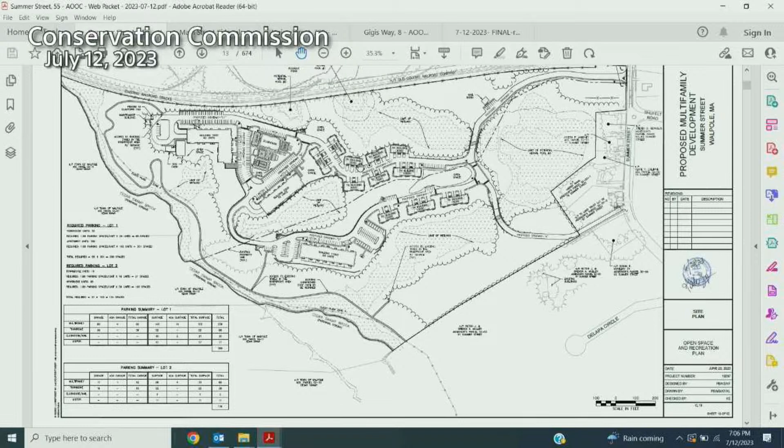Okay, thank you. So to remind the board, we are looking to modify the existing permitted project. The majority of the work is happening on Lot 2. What sheet are you on here? This is dated, called the red line plan. Is it in here? Do we have it? We have a truck turning plan. What's the number on the sheet? This was an exhibit plan previously submitted, dated June 6th. Oh, so from the last meeting, not in this package? Yes, it wasn't from the plan set.

Okay, go ahead. So this is the red line plan that was submitted, detailing the changes between the previously approved conformance plans and the new layout. On Lot 1, we have the removal of driveway B, which had the 2 townhouse units, in favor of the mail kiosk. On Lot 2, we have the single-family units along driveway D being removed, and the entire cul-de-sac as well as all the single families - all 56 single families are no longer being constructed - in favor of a rental project, which is going to be a multifamily building and 3 townhouse units: two 6-unit buildings and one 4-unit building.

Where the previously proposed and approved cul-de-sacs and single families are, it's just going to be the crossing and the emergency access back out to Summer Street.

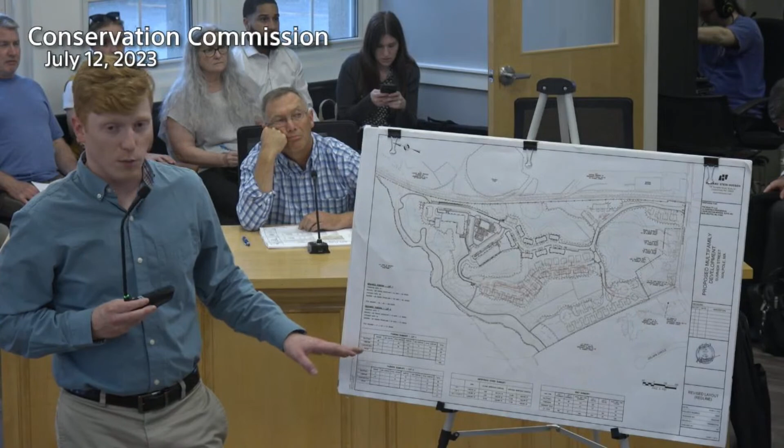We have the same 268 number of units between the 2 lots, and just some parking arrays adjacent to the multifamily building on Lot 2, as well as the conforming amount of parking per the previously approved decision. Overall, there's a reduction in impervious area and amount of development.

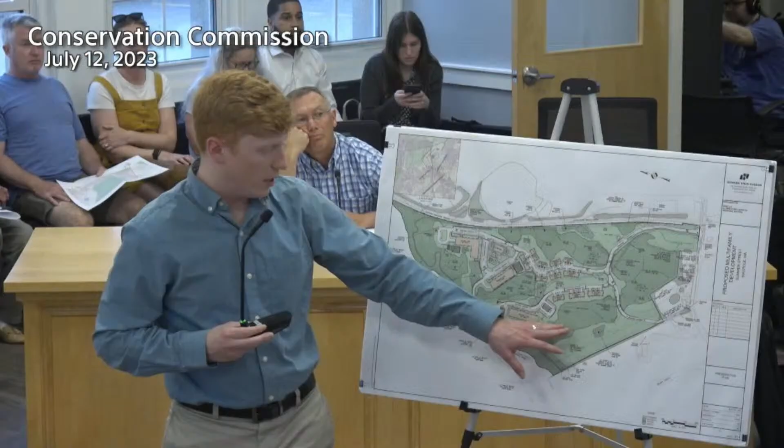On Lot 2, let me switch plans here. It's a colored up plan, which I previously submitted earlier today, which shows the overall development colored up between the impervious area, the building, and the areas for stormwater. In this area, you can tell there's a significant reduction since you only have the proposed infiltration pond here. That's a high level overview of the changes, and that's the red line plan.

High level overview of the changes to the plan. For stormwater, the program works very similar to how it was previously designed. There's a pocket wetland here which handles everything from the crossing, this entrance to the crossing, and that'll remain as designed. This center area is going to be an infiltration pond, as well as the addition of 2 StormTechs.

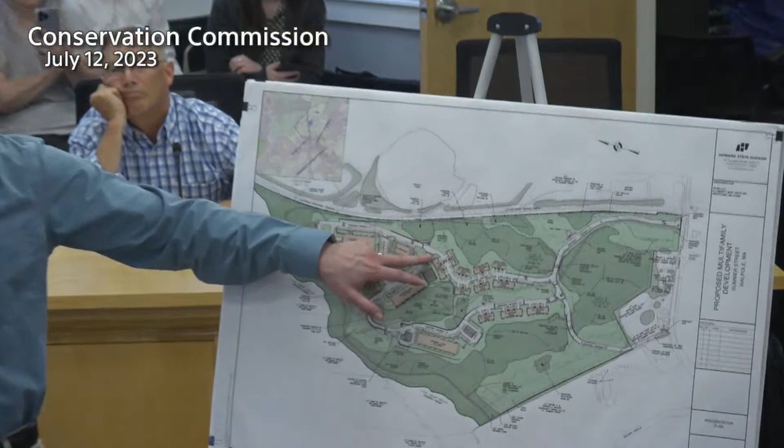All of Lot 1 is basically going to be identical to how it was in the conformance plans, with the exception of the reduction of this townhouse unit, which was flopped onto Lot 2. And where the emergency access goes out, you have the infiltration pond, which handles just that runoff from the other side of the crossing.

Any questions? Or I can go into any more detail if anybody is looking for additional detail.

Liz asked, are we gonna actually do anything with this giant set of plans? No, that's a truck turnaround plan.

The truck turnaround plan is very similar to the truck turnaround that was in the conformance plans, but it just details how the truck turning will work with the new layout.

That's not our jurisdiction, so why don't we have a set of plans that shows what you're talking about? That was all submitted with the package. No, these plans aren't anything like what you're talking about. There was a full package submitted on June 20th that had all the design for the entire site.

Yeah, stamped and signed on June 20th, it had all the grading, layout, landscaping. Maybe they're coming.

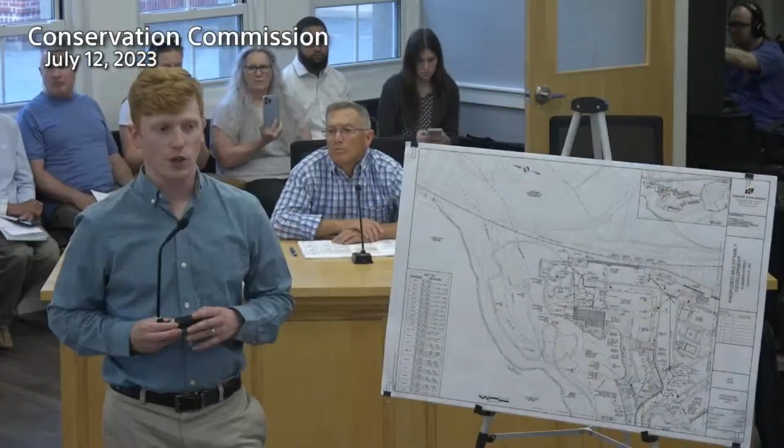It seems weird to have a truck turnaround plan. Yeah, we actually didn't submit the truck turning to conservation, we only sent that to ZBA. So they resubmitted the whole plan set, which Stephanie is sending out.

Start at the beginning and tell us what page we're on here, so we can follow you.

If you go to the open space and recreation plan, which I think is sheet 13, that'll probably give you a very similar overview of what this is, but this one's in color.

That should show you the open space area, the developed area, areas for recreation, as well as outlines of stormwater. That's pretty much an overview of what this is, and like I just walked you through how the stormwater will work on the site, and the changes shown on this plan, how we went from the single family to the rental portion.

Did you send that PDF to? This PDF? I sent it to you. Oh yes, I sent it to you. I apologize if I was supposed to CC you.

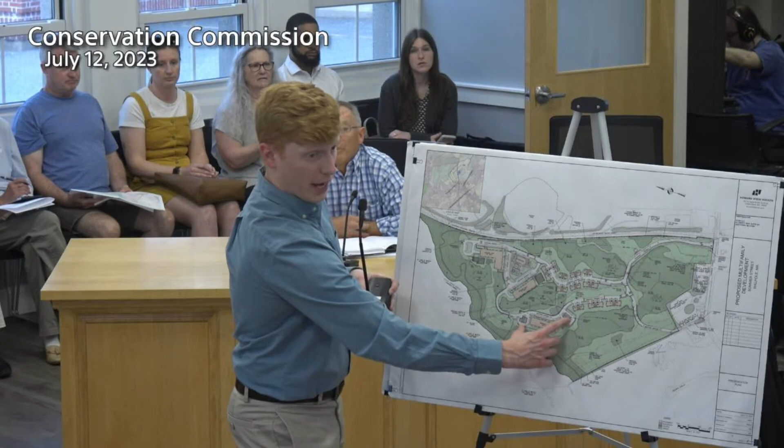So the modification to the stormwater is just the lower part of the project where it changed from single-family houses to apartment buildings. There was a slight modification of this pond here to adjust with the small adjustment of the alignment of this road. It got a little closer here, and because of that, we had some StormTech added to handle this roof runoff, as well as take up some additional capacity.

You could point to the sheet in the larger packet that addresses that area so they can see it more in detail. Sure, that'll be the grading sheets, sheet 20. Sheet 20 shows your drainage basin, the grading sheet. So grading sheet 20 has the detailed grading plans. So if you go to, that would be C20. C20, yes. Is there another number?

So is the stormwater increasing or decreasing, or really just modifying how you handle it? So, yes, the stormwater flows are very similar in the 2, 10, and 25. The 100-year flow and volume are decreased from the previous design, and that's shown in the supplemental data report. There's a sheet that has the difference between the pre and post flows, which was previously in the conformance plans as well, and that details the change as well as all the conformance with the TSS calcs and everything like that.

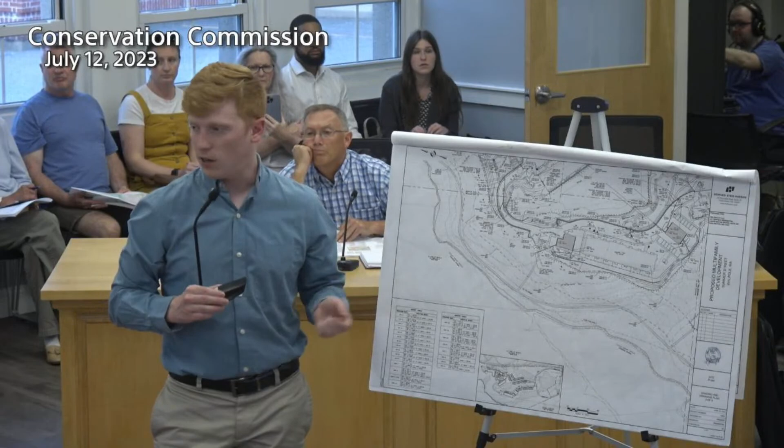And the C20 plan that we're now looking at has two infiltration areas. You're infiltrating the stormwater, the darker areas. Yes, so here is the pond, the infiltration pond 1, which is a slight adjustment to what it previously was. It had a bit more volume here, so we adjusted the volume and then took up some of this additional volume with these StormTechs under the parking array. This one overflows back to the pond, and this one just infiltrates and then overflows to overland flow.

And the envelope of the limit of work is the same, you're still out of the 200-foot riverfront area. Yep, no adjustments to the 200-foot riverfront. A couple silt fence adjustments along here, still out of the 25-foot no-disturb zone. And that would be the wetlands at the upper portion of C20. Yes, but overall, it's the same or a reduction. So other than C20, is there another plan where you have modified the design?

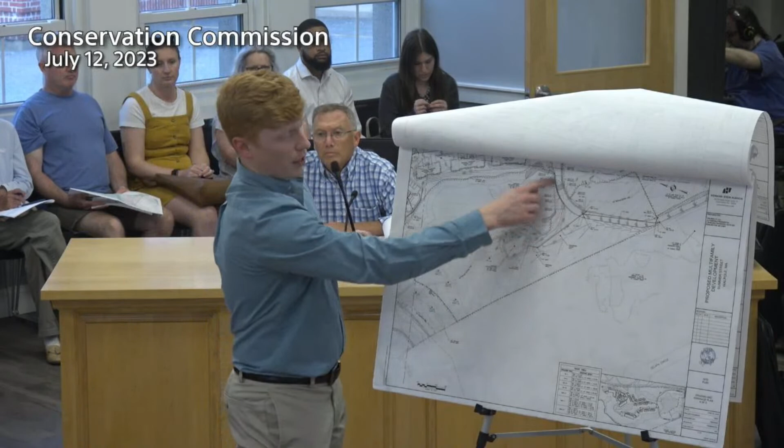So yes, if you go to, you can also see it on C21, C22. C22, yes, for sure. That'll show all of anything on lot 2. You're gonna see grading adjustments for the adjustment of the road, the stormwater, the ponds for the emergency access, which you can see on C22. You see the emergency access, a slight alignment change here, which also yielded a slight reduction in the second wetland. C22, yep, you have a slight reduction here in the crossing impact, and then you have some grading associated and the piping for the infiltration pond.

For this section, again, the road construction is bigger. Exactly, yeah, and high point here, high point obviously at Summer Street, that comes down to the low point, pipes in. Very, very similar drainage, almost identical drainage patterns to the previous design, just a reduction.

So I didn't have a lot of technical questions for this because the envelope was the same. They weren't, as was discussed at the last meeting when the commission was trying to decide if it was a new notice of intent or an amended plan. They're not working on any additional wetlands resource areas. The envelope is pretty much the same. There would be some modifications to stormwater, which Patrick is explaining.

They also have to go back before the ZBA for a modification to the 40B. I talked to Patrick DeShanes a little bit about that, and I don't think it warrants both of us hiring a peer reviewer, but as long as one of the boards is hiring a peer reviewer to go over the changes or modifications to the stormwater. Since their consultant will be going over other issues as well, maybe it's easier for them to also take on the stormwater issue. But obviously, it's up to the commission, however you guys feel. If you want to do a peer review on the stormwater, then I can let them know. But it didn't seem like there were a lot of changes that affected conservation. Has a peer review been selected for ZBA?

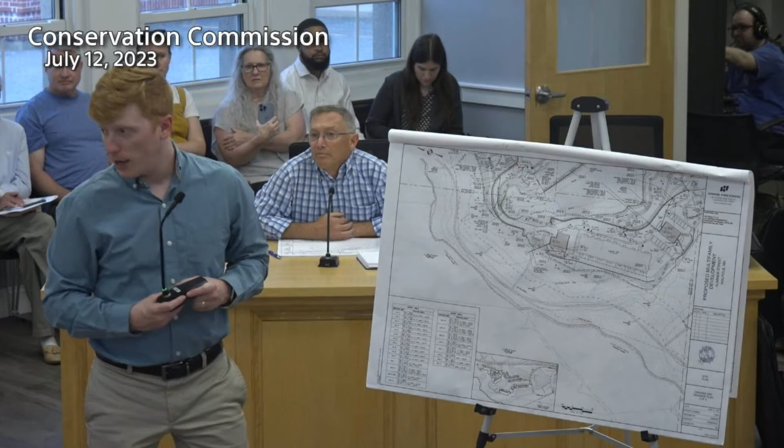Anything else, Doug? Okay, that's it. Emilio? I would just agree with using the same consultant as the ZBA, so there's no sense duplicating that effort, so I would agree with that. That's all. Betsy? No comment.

Al? I want to see what the peer review shows us, to see if they agree that it's minor adjustments, because from this presentation tonight, it doesn't give us enough information to make a determination on the validity of that, so I'll wait and see what the reviewer comes up with. Okay.

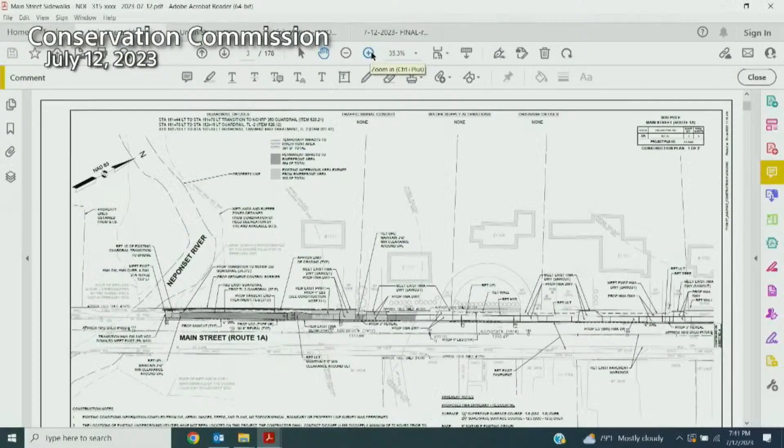As far as the resource areas go, all the action is on sheet 3 of the plans, where the Neponset River crosses Main Street. There's bordering vegetated wetland and inland bank along the Neponset River, which has a 100-foot buffer zone associated with it. There are no direct or temporary impacts to either of those resource areas. However, due to the proximity of the proposed sidewalks to the river, there are impacts to that 100-foot buffer zone. There's also bordering land subject to flooding associated with the river, but the elevation of the floodplain is below the elevation of the road, so our sidewalks have no impact on bordering land subject to flooding.

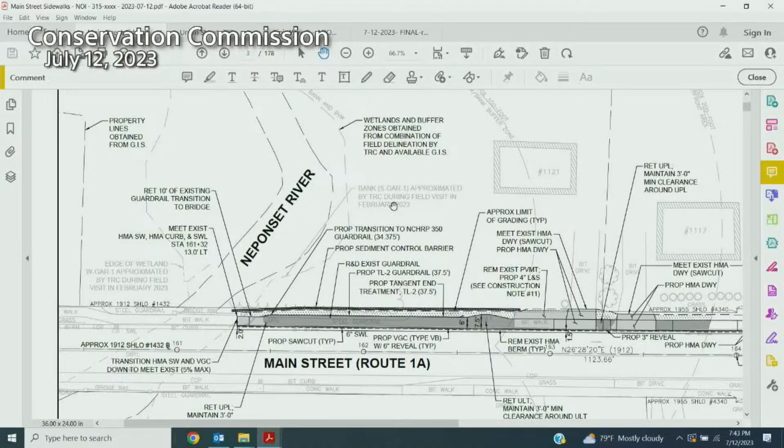And finally, the riverfront area is 200 feet from the Neponset River. We are proposing 1,455 square feet of impacts within the 200-foot riverfront area. 591 of those are temporary, meaning it's just proposed grading within existing grass or pervious areas, and at the end of the day those will go back to being grass areas—we just need that area to work during construction. And 864 square feet of permanent impacts to the riverfront area, associated with the new 5.5-foot hot mix asphalt sidewalks being proposed.

There's also 990 square feet of existing pavement within our limit of work that's also within the riverfront area, so that is considered exempt under the Wetlands Protection Act as existing impervious area within the riverfront. It's important to note that where these impacts are proposed within the riverfront area, it's an existing roadway shoulder along Main Street—previously disturbed. A lot of it is either poorly maintained, dying grass or gravel area that we're going to transform, putting in new vertical granite curbing and asphalt sidewalks.

As far as mitigation goes, we're proposing silt sacks and some form of erosion control, either a filter tube or a silt fence during construction, to prevent any sedimentation from reaching the river. There's one existing catch basin within the limit of work that we'll replace—it's fairly dated and does not have a deep sump. The one we replace it with will be an upgrade: a deep sump and hooded catch basin that provides 25% TSS removal under the stormwater regulations. Finally, everyone will see improved collection of stormwater along Main Street by creating that hard edge with the vertical granite curb, directing the water directly into those catch basins and getting it off the street faster.

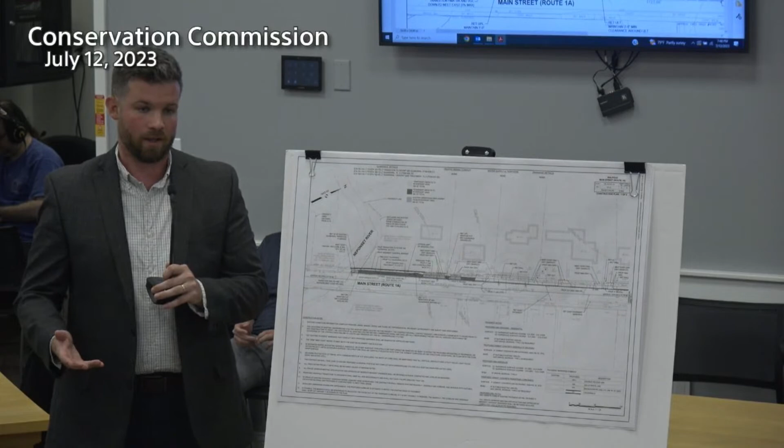And just if, after you take the pavement up and scoop the material, you have a significant rain event along the linear path, will you have erosion control available on-site quickly if needed? Contractors typically do have some kind of staging area nearby they can go to and from with materials. It's pretty common for them to have extra filter tube or silt fence in that case. That's actually the first thing that gets installed prior to construction - the filter tube or silt fence along the limit of work line. All of the existing drainage patterns will be maintained. There's a few catch basins near the limit of work, and those will have silt sacks in them, so all the water will continue to go where it does today during and after construction.

I don't really have any other comments. I think sidewalks are a good thing, and there's minimal work being done. There are new concrete sidewalks up on Washington Street, and sidewalks further down on 1A, so I'm kind of familiar with the process.

Dean, are you planning on putting your erosion and mitigation plans in before saw cutting? That's correct. Okay, no other questions?

One question - the asphalt sidewalk, will it be recycled asphalt or? DOT spec. Yeah, exactly, I knew you were going to ask that. I actually don't know the answer to that - obviously this is Mass DOT, so the material will have to meet their spec. I can guarantee whatever we use is perfectly acceptable construction, it's very standard construction material. It comes from an asphalt batch plant, and certainly would be something acceptable by Mass DEP.

So this is what, year 3 of the Main Street reconstruction? Year 3, 4, lost count. Hold on, this is way south of that - different, this is a separate project. Oh, separate project, this is south of town. South, I'm sorry, I apologize. Okay, then was it - okay, never mind. Country Kitchen? No, this is not near Country Kitchen, this is before the big tree, down near Greenwood. Near the train station? Now you're confusing me, you're messing with me now. Okay no, I'm sorry, it's on the way to Cumbies. That's right, we've rerouted - that's the right way. Neponset River. It is. Anything else, Emilio?

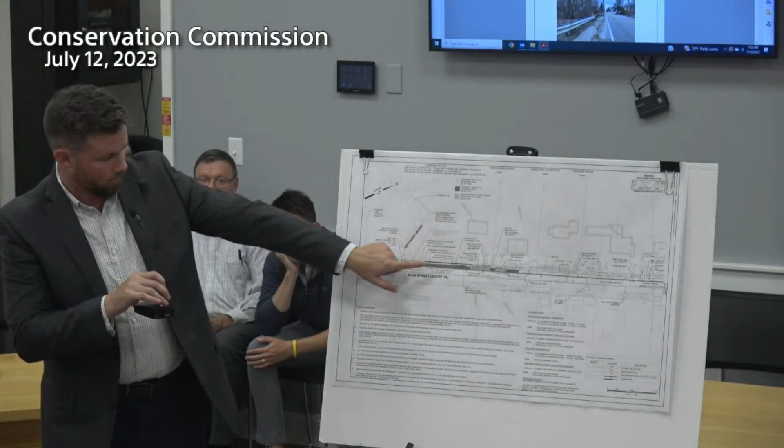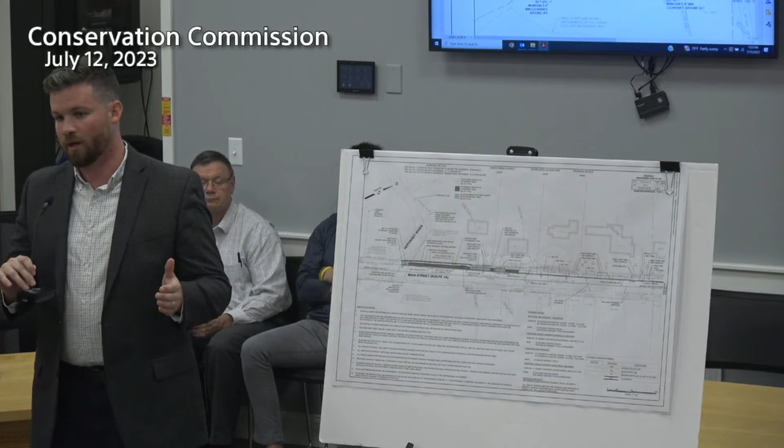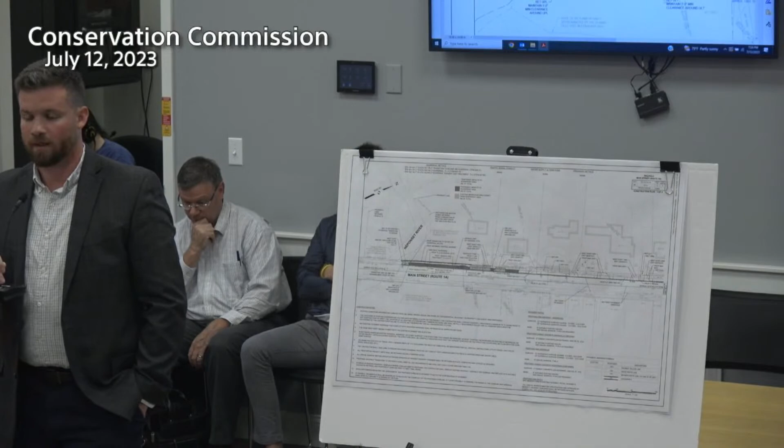Anyone in the audience have any questions or comments? Please identify yourself for the record. Okay, someone make a motion to close the hearing?

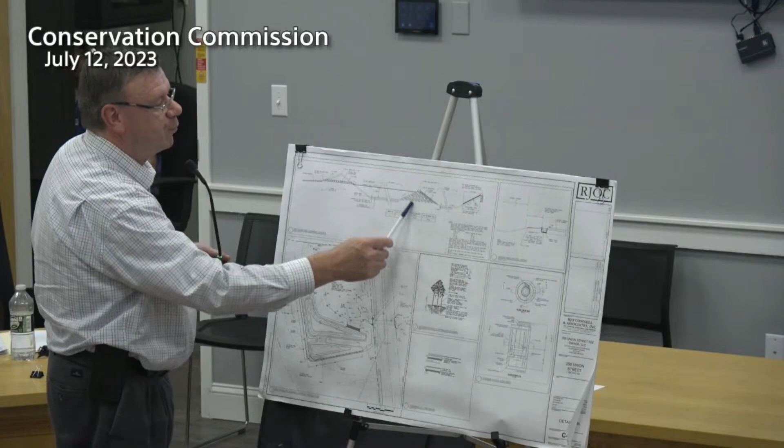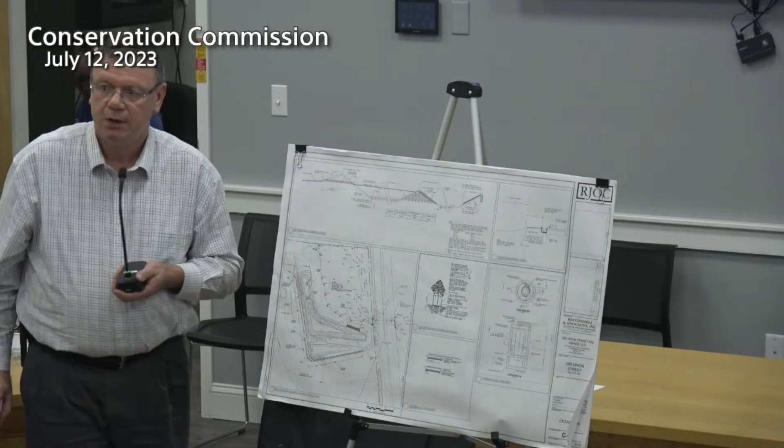In this basin too, it's a sheet flow into the basin because everything's so shallow out there, so we sheet flow into the forebays before it spills over into the wet basin. This up here shows a cross section of the basin, showing one of the forebays, the berm, and then the wet basin area, and the outflow over here. The outflow is a spillover from the wet basin to the wetland. So that's the modification we've made, and that's the request to amend the order to allow that design.

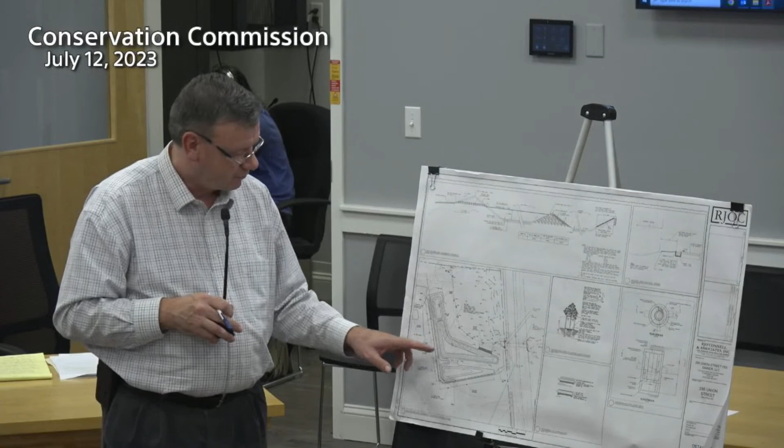What's the treatment? So when it spills over into the wet basin, there's a different seeding for this now. We changed the seeding to be a wet basin seed mix. So when we seed this wet basin, you're going to have vegetation growing along the edges of the pool and up the side slope of the pool. That vegetation is what helps to remove the phosphorus and those floatable type contaminants.

So on the DEP schematic, that's more of what it is, but on your schematic it looked like your wet basin seed mix is just everywhere, right? Yes, it will cover everything. The key for the wet basin mix shows it in the forebay and the wet basin everywhere. That's true. We want to try to have the vegetation grow anywhere there's water, so it helps with pollutant removal. So even in the forebay, the sediment will drop out, but with vegetation around it, you still get more treatment for the floatable type.

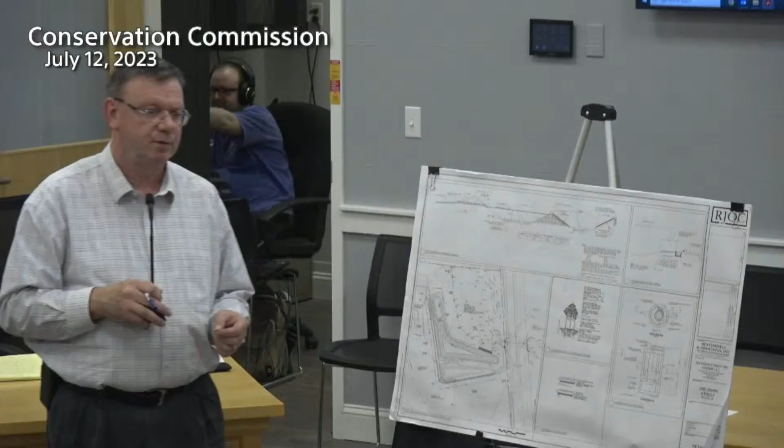So does your operation and maintenance plan reflect that process of the wet basin, which I think you described as being mowed? If you're using the wetlands vegetation as part of the water quality component, that should be reflected in the O&M. So we revised the O&M and resubmitted it. Maintenance in the O&M comes out of the DEP Stormwater Handbook, so we take that maintenance criteria and put it into the O&M. There'll be an inspection once a year, and side slopes and embankments should be mowed twice a year.

So you're mowing the side slopes twice a year. You're not maintaining a wetlands community, you're mowing it. Yeah, so we took it right from the DEP handbook. That was the criteria we followed.

I think the wet basin criteria permit, well the wetlands, they have a couple different things: perimeter vegetative buffer access, maximum pool slopes. So I have to go through this, but it just seems like if you're mowing everything twice a year, you're not going to establish wetlands vegetation that's going to help you with nitrogen or phosphorus. Well, we don't have to do that. We can remove that mowing requirement from the maintenance.

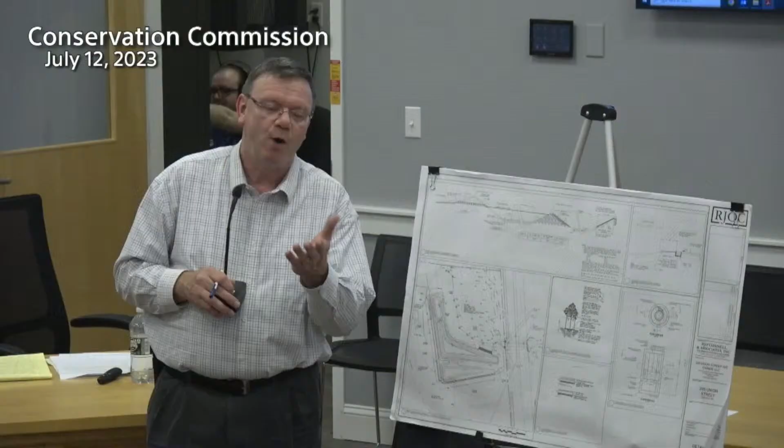Or I guess it would depend also on when you're mowing it, because when establishing a herbaceous layer, you don't want it to get established in the spring and then decide to mow it all down. That doesn't make sense, right? So maybe a little more thought in the maintenance plan as far as the wet basin and what you're trying to achieve for water quality.

It is a tributary to the Chapel Brook, so I understand there was nothing there before, but I also understand that you designed a basin that doesn't work. So we want to make sure that this does work and serves the best way possible for the Chapel Brook and the area. So that would be my suggestion, just a little more thought on the maintenance and what you're planting and how it's being maintained. And the 4 bays, I'm not sure how you're going to clean those out.

That's it. Okay, Dean?

What's the plan for this? So the bottom of this basin is the same elevation as the groundwater, high mean groundwater, seasonal high groundwater. Yes. So theoretically, let's say we have a very high rain event, a lot of spring water, groundwater comes up, and all of this sediment and water goes spilling into the brook. The way it's set up is, that's why you have the 4 bays. The water goes into the 4 bays first, so the sediment will drop out in those pool areas.

I understand, but what happens when the water comes from below? Right, but the sediment's heavy. You're saying it's going to pick the sediment up? With the groundwater, if the groundwater rises? Yeah, so the sediment will fall out in a still pond area. It's not moving, so it's heavier than the water, so it's dropping to the bottom.

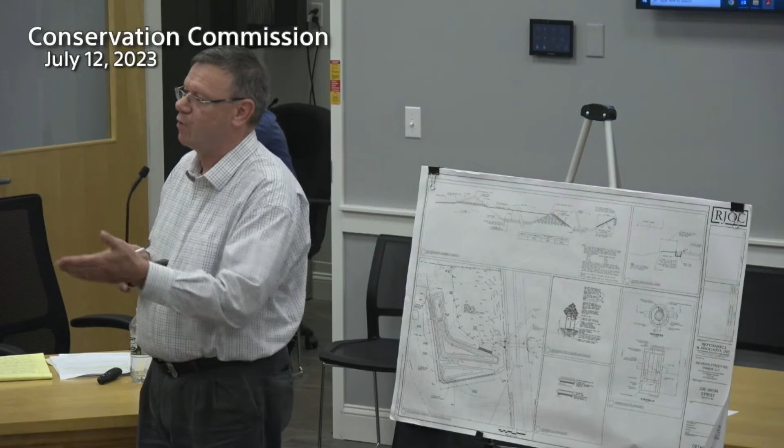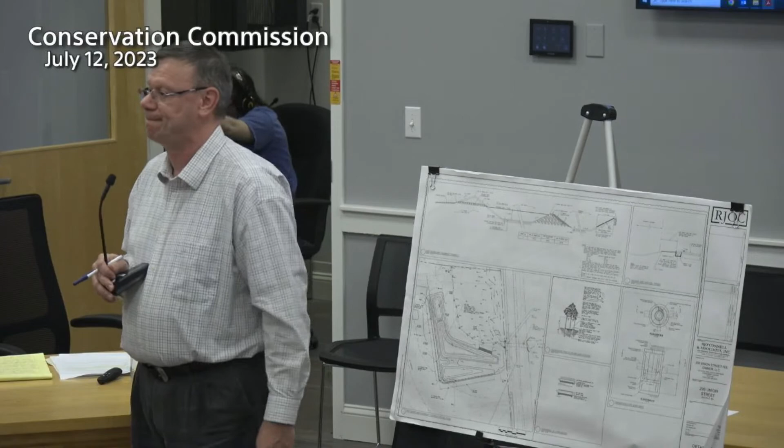So what's the base of the basin gonna be made out of? It's gonna be the existing clay silt soil that's there, which is actually the requirement in the stormwater handbook. For this type of basin, they want you to have that clay silt soil in the bottom. And so the wet basin, the big one in the middle, spills out into the brook. Essentially, we are hoping for TSS-free water.

I'm also concerned with the removal, the maintenance plan. So does this parking lot flood a lot? When there's a significant rain event, it has some puddling, but besides that, it's mostly flowing into the basin we have now.

So no flooding from groundwater? No, groundwater's not coming up because of the soil that the site is made from. All right, great. So experience wins there, okay. Maintenance of the bays.

What are you gonna do with the water currently in the basins when you do the work? So we're gonna have to dewater it, and what we'll do is create a gravel pit with a sump wrapped in filter fabric, so that the water gets pumped out clear of sediment.

Okay, if you could, please do not pump it right to the river. I have to explain that. People don't understand that all the time. To the catch basins, which is for sediment retention, and try not to kick up the sediment when you're dewatering.

Yep, that's it. Really? No questions. Okay, so it sounds like we have to continue this until we see some really clear planning, but I have a couple of questions about the wet basin in the proposed maintenance plan as it stands right now.

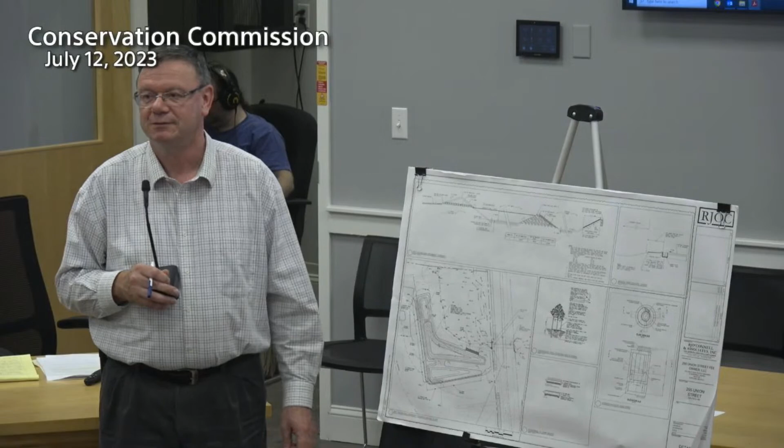Of what? What's in there right now? I don't know the plants. All right, that's it for now. I have a couple of comments. One is, I've seen that section of Union Street under a foot of water, okay, and I know that happens, so I'm not so concerned about that.

What I'm concerned about is what Betsy just mentioned. When you mow, I'd like to see a system of mowing where you pick up all the stuff you cut. You don't just leave it there to rot and cause other problems.

So the banks of this area, where there's going to be established a permanent growth of material, my mind is that you should mow it once a year, and you should take out all the stuff you mow, not leave it there to cause more problems. So if you can include that kind of stuff in the operation and maintenance plan, along with removing built-up sediment amounts every couple of years, I think we have a chance that it could do as you say.

But I think this is more realistic than the plans we saw before, and I think it's good to see somebody has realized that a design they had previously couldn't work. So I think this is a good step in the right direction. And I know that there are ways you can prevent this pool of water from being so-called polluted.

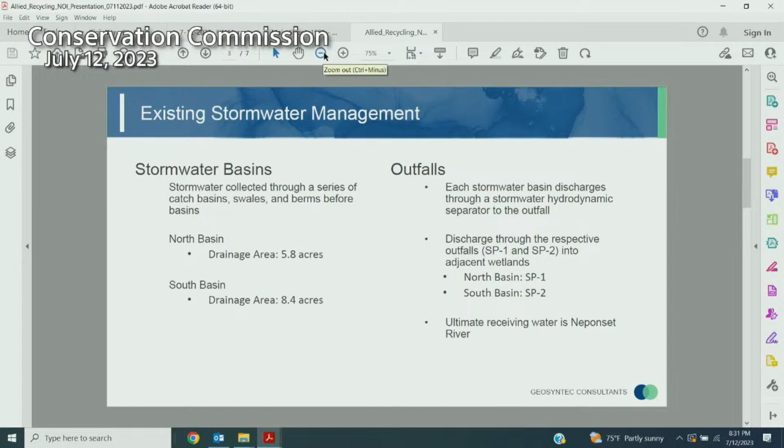The existing stormwater management on site consists of stormwater basins that discharge to outfalls. Stormwater is collected through gravity drainage, and there are two basins, the North Basin and the South Basin. Each basin discharges through a stormwater hydrodynamic separator to the outfall. The North Basin discharges to outfall SP1, and the South Basin discharges to outfall SP2, with the ultimate receiving water being the Neponset River.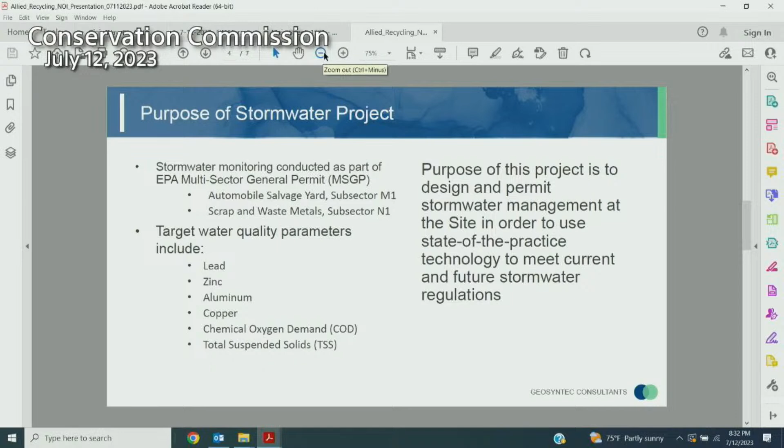The proposed stormwater management consists of a stormwater system, expansion of the existing basins, and the addition of an active treatment system. As before, the stormwater is collected via gravity collection through catch basins, diversion berms, and storm drain piping. Pre-treatment is provided via a hydrodynamic separator, deep sump catch basins, and a CIP pre-treatment chamber before the south stormwater basin. Both basins are proposed to be expanded to include outlet control structures and a pump chamber.

The stormwater from both basins will be pumped to the active treatment system, and in the event of large, infrequent storms, some of the stormwater will be discharged through the existing outfalls, SP1 and SP2. The active treatment system will add filtration and ion exchange processes to treat the stormwater, which will then be discharged through the new outfall, SP3. The design of this treatment system will be confirmed through a bench scale study, and the full-scale system will be developed by WaterTectonics.

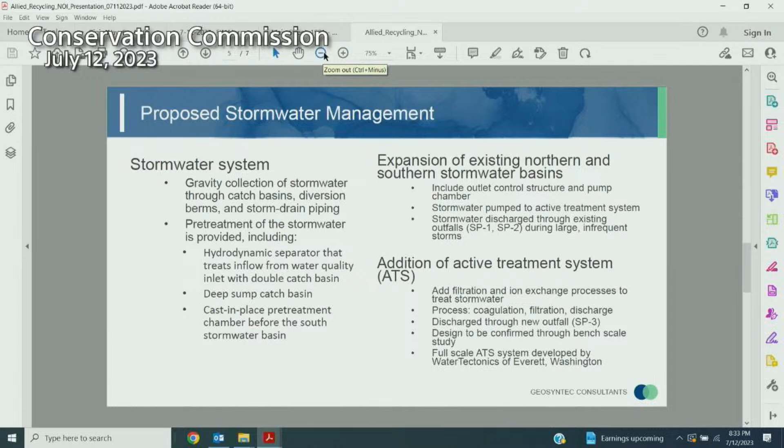This figure, which is the same as what is shown on the plan here, shows the proposed stormwater management I discussed: the two stormwater basins that collect stormwater via gravity drainage, which is then pumped to the active treatment system, where it will be discharged through the proposed outfall SP3.

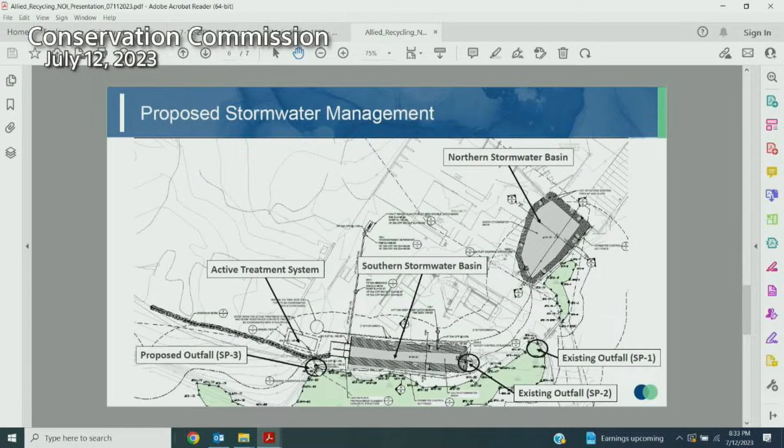So there are impacts within the 25-foot no-alteration boundary and the 100-foot buffer. This includes the basin expansion, the drainage work, and the active treatment system installation. Both of the existing outfalls and the proposed outfall are within this buffer, but there are no direct impacts to the wetlands. We've received the comments from earlier this week and are planning on incorporating those. We're just hoping for some clarification on whether a peer review of the model will be required, and if so, we'd like to get started on that as soon as possible. Thank you.

Okay, Landis? So there are basins there now, so why are they being redone? What has changed? To better meet water quality parameters, just to improve the water quality. Yes, and if I remember, are they both concrete bottom basins?

There's no infiltration for these basins. No, they're not designed as infiltration basins. I would have to check, but I believe the North Basin was originally designed as a concrete basin. Either way, there was no infiltration. So the basin bottom will be designed so there's no infiltration. Yes, I believe there's a liner, but I can confirm that.

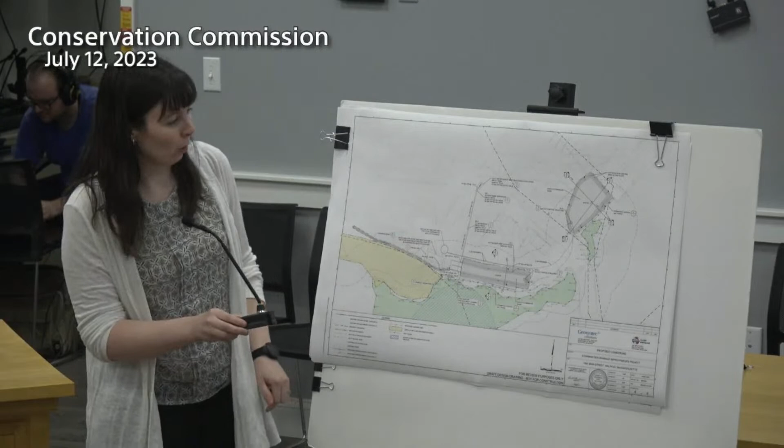Sure, I can point it out on the plan. So in general, stormwater is collected through gravity drainage, through catch basins and a diversion berm shown here, and then catch basins here and here. And then the stormwater is diverted to these two stormwater ponds. This one right here is the north pond, and this one is the south pond. In the existing condition, both of these ponds discharge through outfalls. This north pond discharges to outfall SP1, which is here, on the south side of the road. And this south basin discharges to outfall SP2, which is right here.

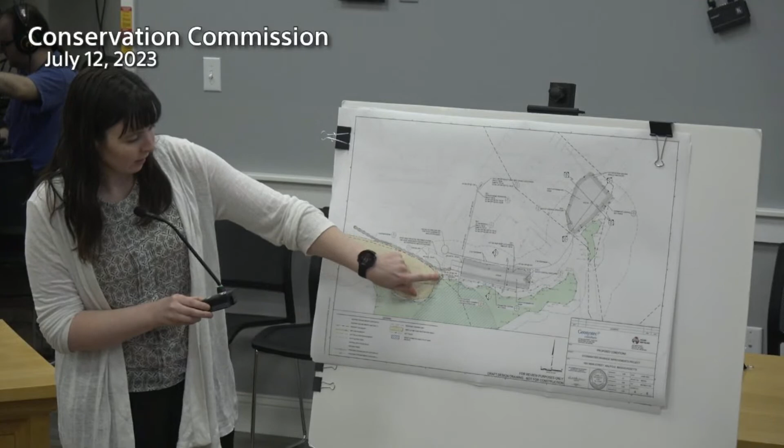In the proposed condition, stormwater would only be discharged through these existing outfalls during large storm events. The stormwater from both basins is pumped to this active treatment system, which uses ion exchange processes to treat the stormwater. Then that treated stormwater is discharged through outfall SP3 down here. That's the stormwater system.

Sorry, would you like me to move this closer? I realize it's pretty far away. Okay, in front of them.

The stormwater is discharged, and where does it go when it's discharged, since it has all this metal in a liquid form? Where is it going from there? Well, it is treated through the ponds and through the system, but once it's discharged, it goes near this wetland here and then ultimately to the Neponset River. That's the ultimate receiving water.

So you're expecting the wetland to do the treatment? No, got a pre-treatment. She has pre-treatment, two ponds and an active treatment, which I see, yes, that's correct. The ponds, the active treatment, and the area right here collect it. Okay, what are you using for the ion exchange active treatment? Wait a minute, wait, let's wait, one at a time. Okay, so...

I'm just concerned that we get this material in the water, and somehow we have to get it out of it. How are we getting the water cleaned? What's the process of cleaning the water? So the stormwater basins and some of the gravity system provide pre-treatment, and then the active treatment system is designed to treat the stormwater based on the water quality data we've collected. That's done through filtration and an ion exchange process. There's a coagulant added, flocculation occurs, then there's settling, and then it's discharged.

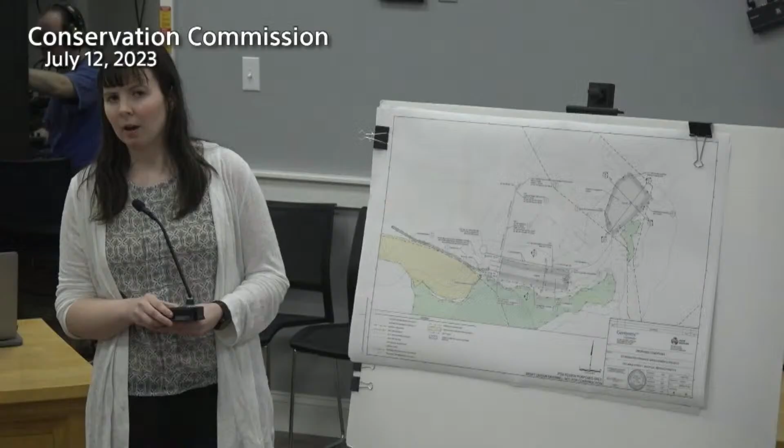So is that material that's filtered out ever taken away from there and used for some purpose, or disposed somewhere else? I would have to check with the manufacturer specifications. This active treatment system is developed by WaterTectonics, so they do the chemistry behind the treatment. They would have a plan as well for what to do with the disposed materials.

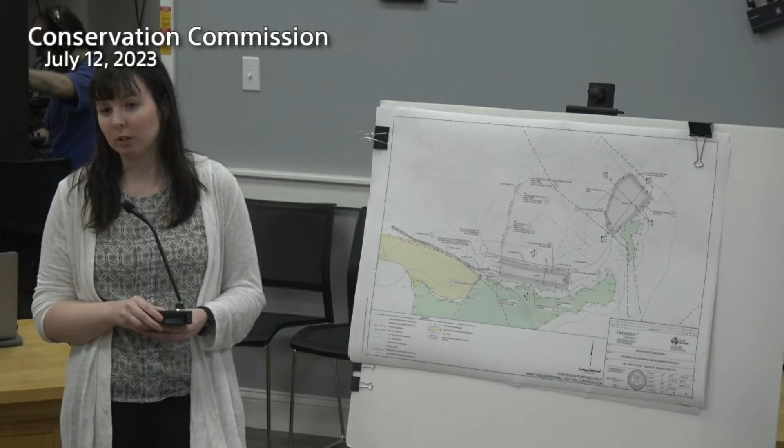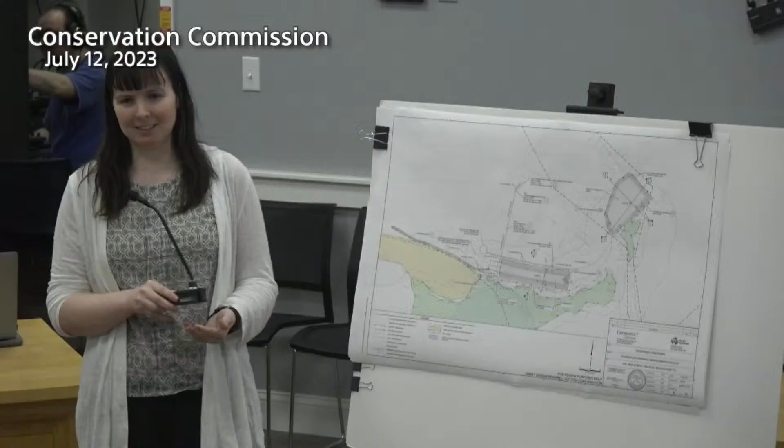If it's important to take it out of the water, I want to know where it's going. It would likely be disposed of in a landfill or similar place designed to store it, not just left on site to be added back into the stormwater. So my concern is after this material is filtered out, I agree it can be done, but I want to know where it's going so it isn't poisoning some land somewhere else. We've had all these old landfills, very dangerous, making the news for years, and some will never be cleaned up.

So I want to make sure the material that's filtered out is going somewhere. Probably it could even be reused. We can put that in our order. Anything else, Al? No, that's my concern.

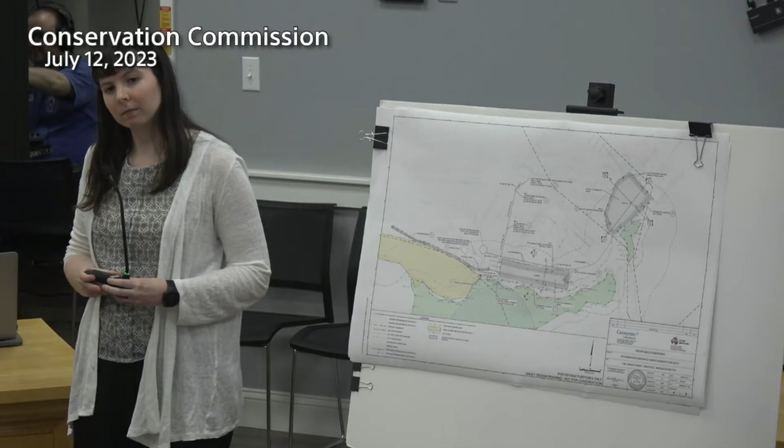I think we should have the O&M manual for the treatment process - what are you calling that? Active treatment system. We need to see what those recommendations are, if that's adequate for the maintenance and removal in a satisfactory manner that meets whatever type of waste this is considered, disposed of in accordance with those requirements. So we need that, and if sufficient, it could be included as part of the O&M manual. I think we need to review that and see what it says.

The routine maintenance that was submitted just says see manufacturer's specification, for both the active treatment and the hydrodynamics, so probably need a little more. I think we need to know what that includes. I don't think you included it. No, those were not included. Depending what they come up with, some have good explicit directions, and some may just say clean it up when you get a chance. So we want to know what it is.

And we don't have a DEP number for this? Okay, so we need to continue the hearing.

Does anyone in the audience have any questions or comments? Please identify yourself for the record.

Continue till August 9th. What do we have? We didn't schedule one because it went to September. So 7 o'clock is open on August 9th. We make a motion to continue this till August 9th at 7. So moved. Second. All in favor? Aye.

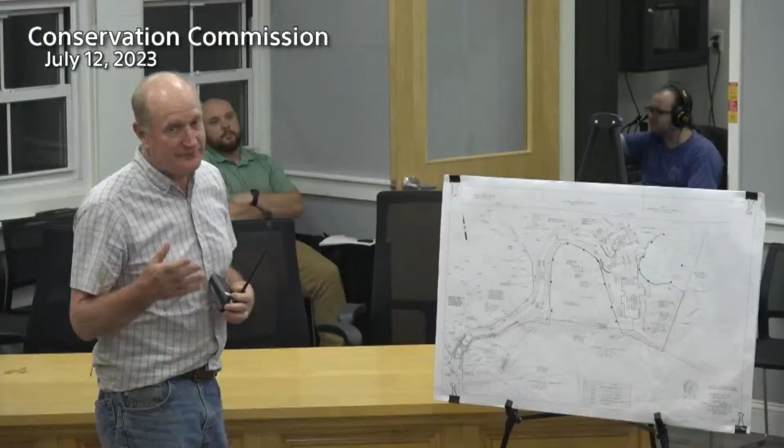So there's really only essentially 3 changes to this plan. We had showed a 6-foot wide culvert, which wasn't even the size of the box culvert. So let me just go back a second. The purpose of the revision or amendment to the order of conditions is to replace the box culvert, which was proposed and approved by the commission, with a corrugated metal pipe culvert.

And what Alan Gary, the current owner of the property, is telling me is that the corrugated metal culvert is a lot less money, like $100,000 less than the concrete culvert.

I'm thinking the reason why it's kind of like why that submarine imploded is the box culvert has a flat top on it, you can push on it and it'll bend. It's concrete, so it'll break. The steel metal culvert is round, doesn't have a flat area on it, so it's harder to push on it to make it deform. And because it's steel, metal, even if you push on it temporarily, it will rebound and go back to its original shape. So it's not constructed the same way that the concrete one is.

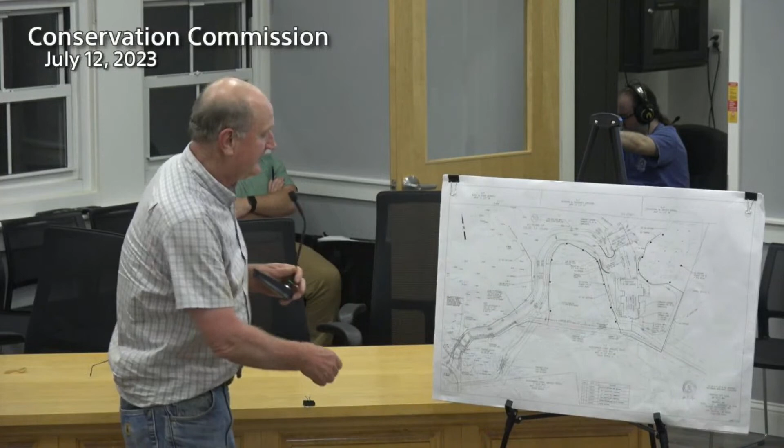And it all comes down to cost, but I'm not exaggerating, when he told me the two numbers, and I'm telling you they were $100,000 different, it's like, oh, I can understand why you don't want to do the concrete culvert now. So even if he only saved $60,000 or whatever, it's still saving quite a bit of money.

So there's the culvert there, right? We all kind of know where this is, the end of Gigi's Way, and it's there to the left. There's like a couple of oak trees, I think there's one that has to come out. And you can, if you want to go see it, it's staked out now, the location. And then just on...

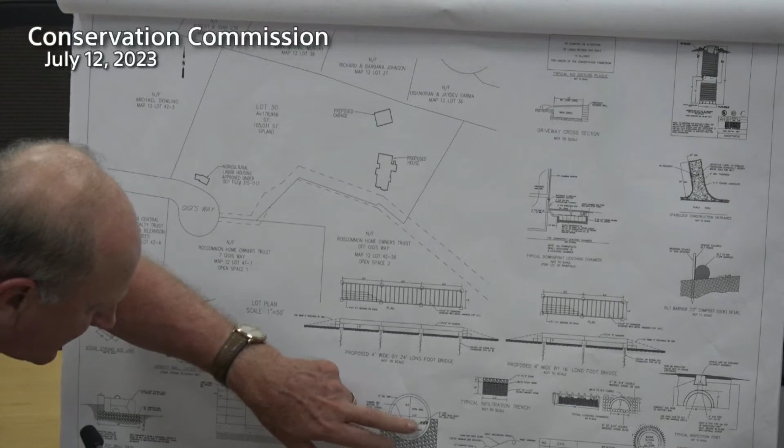And then just on sheet 2, so now we're showing the culvert, we're showing the widths, we're showing the width of the channel, which is going to be, so this is 12 feet, we're showing the banks inside the culvert, so they're going to be 2 feet wide, 2 feet wide, so we've got about 12 feet, minus 4, so the channel width's going to be 8 feet through there. It's a very rocky channel right now, so we're just showing kind of a very rocky cross-section. We want to match what's there now, that's what we're asked to do. And so that was the change to the plan.

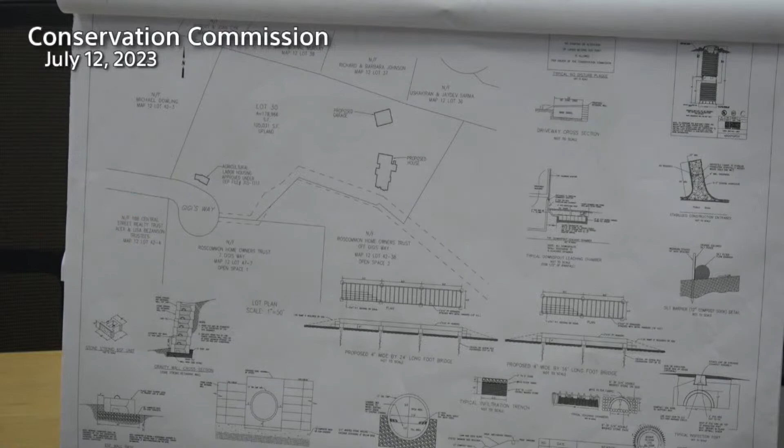The other change to this plan is that, Landis, you had asked about the retaining walls. So that retaining wall that's at the garage, the outbuilding.

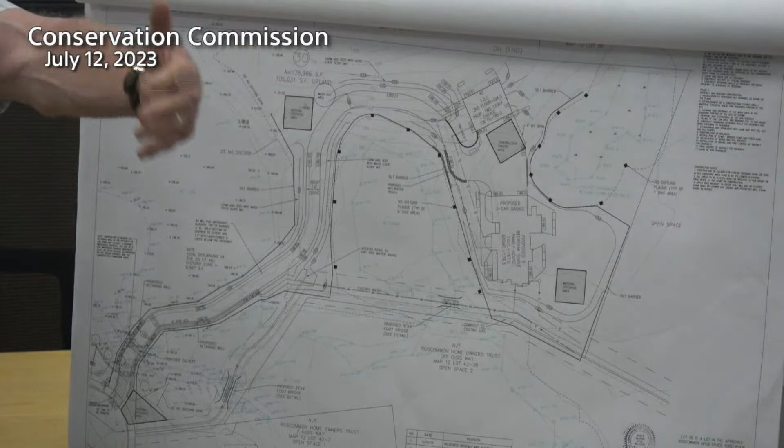So this wall here is, I think, about 6 feet high at its highest. We're doing that StoneStrong, which is a 44-inch deep block. I think they're 44 inches this way and 48 inches this way. So that's what we use, anything more than 4 feet. That thing doesn't need any geogrid or anything like that, just the size of it. So that's this wall here.

This wall here that you pointed out that we didn't have a detail is only 1 foot high. So there's a detail on here now. We're just showing boulders. It'd just be a laid up boulder wall. And then, Landis, you saw my email back to you.

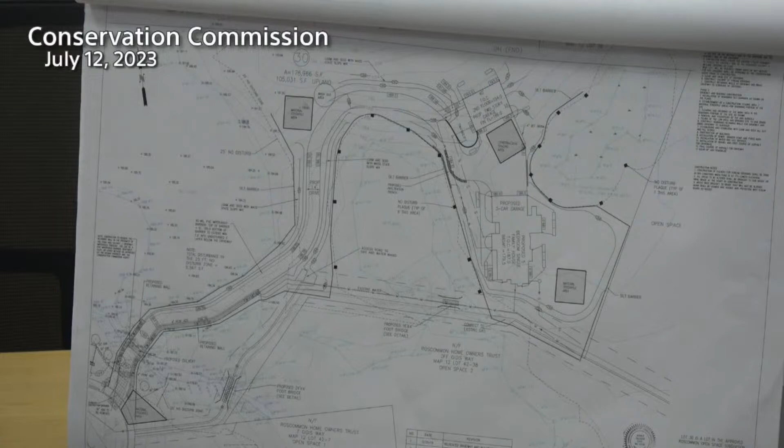As far as those other things, I can't answer those questions. As far as habitat and that sort of stuff, that would have to come from Tom Liddy or someone from Lucas Environmental. That would not be, I would not be the person with the expertise to answer those questions.

Language of the regulations, but you meet those requirements if you have an embedded culvert, which is what you're having, an embedded culvert that has an open ratio of at least 0.82 feet. A culvert shall span the channel a minimum of 1.2 times bank full conditions, so you're going over the stream bed and the bank, and that natural stream substrate and bank be recreated in the culvert with natural materials, and the embedded culvert to be sunk into the ground at least 25% for round culvert. So when you meet those, you meet the other criteria.

For wildlife habitat and stuff, it's so that you're going over the stream, so there's enough space in the culvert for any migration to occur, that there's some side access, that 1.2 is so that they don't have to all travel through the water if they don't want to. As well as so there's enough volume - I think DEP has just realized over the years that when you sink a culvert so that all you're designing for is the flow through, it causes scouring, it causes damage to the pipe, when it comes out of the pipe it can cause erosion, all sorts of things.